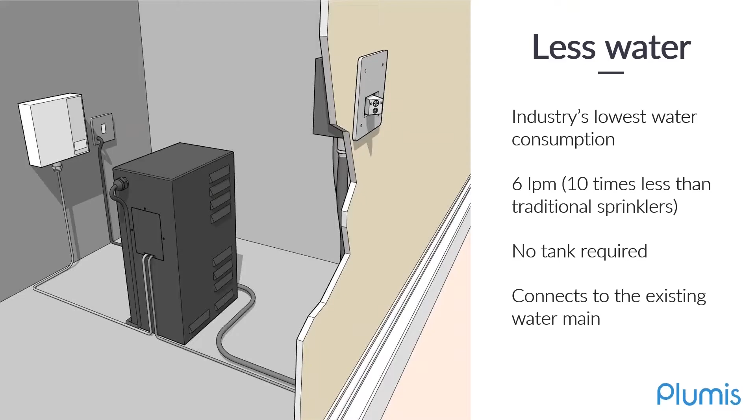And the important point here is that we can tackle dangerous fires with 1/10 of the water of a traditional sprinkler system. So the system draws approximately 5.6 liters of water per minute. That means you don't need a tank, you don't need a water upgrade. You can connect it to your existing water supply. So therefore it's very easy to retrofit.

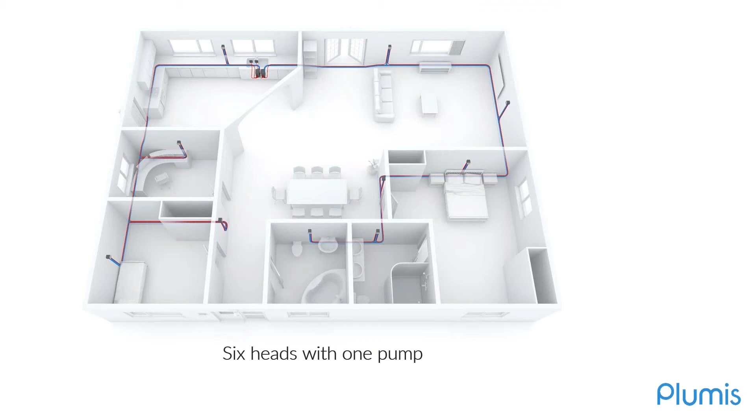You can see the kind of makeup of the product there on the left. You've got your spray head. It's connected to a pump, which is about the same size as a small PC tower. And in a small flat, it might look something like this. Here we've got 1 pump under the sink in this case. And up to 6 heads can be connected to 1 pump. These are spread around the property to ensure you've got a uniform coverage throughout the space.

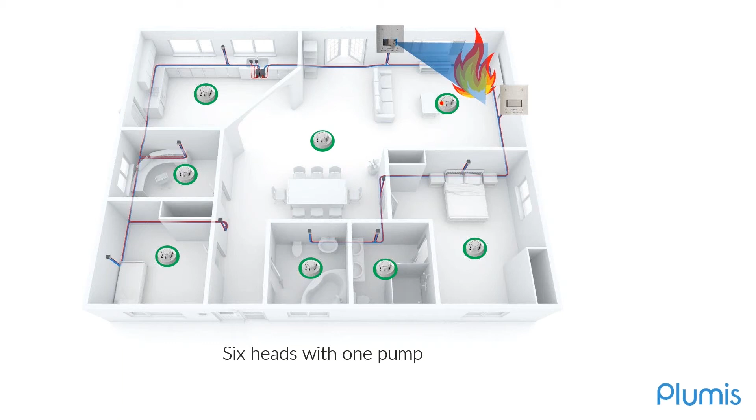Now, just to explain how it works, these heads are paired to the alarms, which are put throughout the property. In a fire situation, you would have the nearest alarm trigger. The heads connected to it would then begin scanning. The data from these heads would be compared, and one head would say, I've got the best visibility of the fire. The other head would close. That head would activate. And this is a really important point. Because we're only activating one head, we can limit the water requirement to 5.6 liters of water per minute.

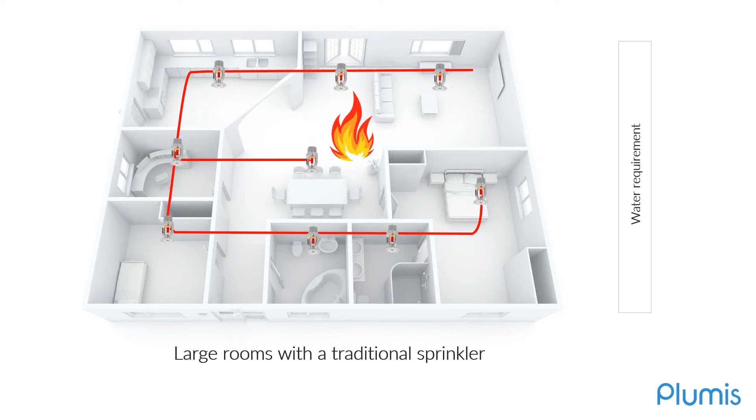This is a significant point because when you have a traditional sprinkler system and you're covering a large space, this room, because of something called AMAO, which is the assumed maximum area of operation, if the fire sat an equal distance between each one of those heads, you have to assume that all 3 of these heads will activate, and therefore you have to provide an adequate flow or water supply so all of those heads can produce the same flow and pressure as was seen when those systems were tested.

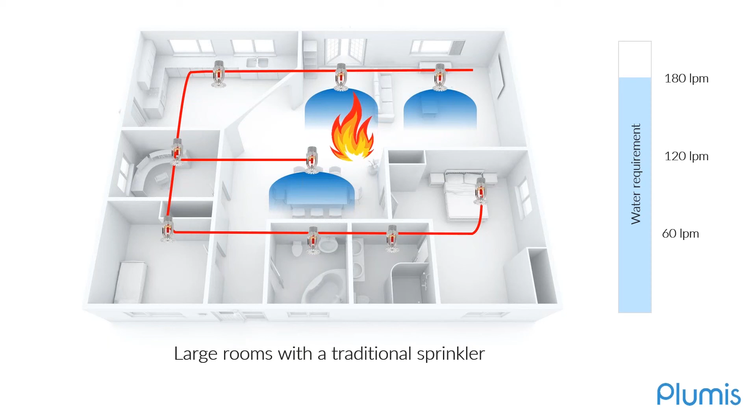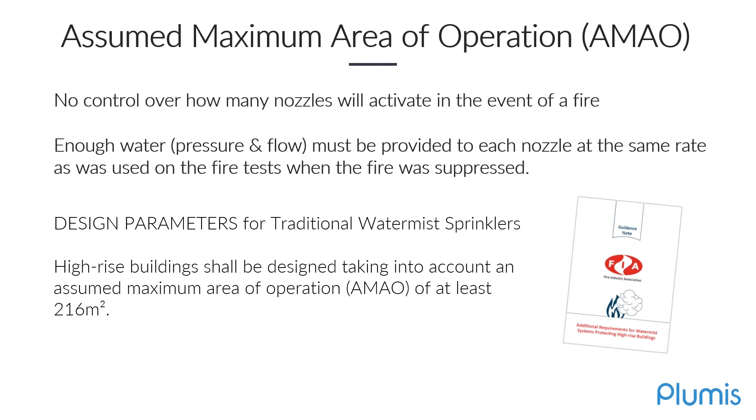So that means in a room or an apartment with a large open plan space, the water requirement isn't just the 60 liters of water per minute. It then increases depending on the number of nozzles, and so in this case 180. So this assumed maximum area of operation can mean that the water requirement is very significant in larger buildings. The FIA recently gave some guidance about retrofitting in high-rise buildings, and they said that it was important that designers assume the AMAO is at least 216 square meters. So you can imagine that's quite a significant requirement with traditional systems.

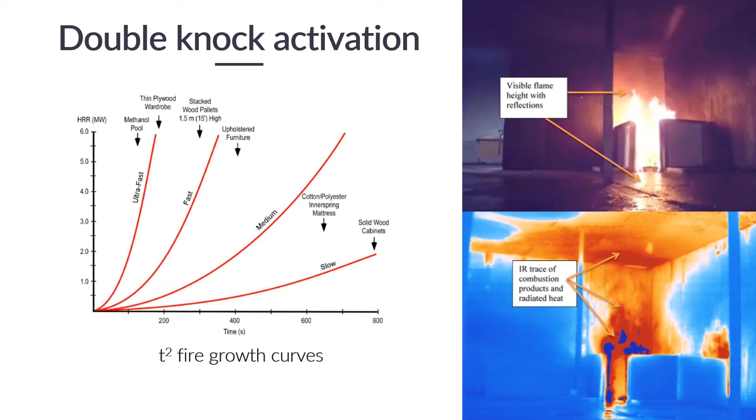The other thing that we do is utilize the same methodology that rate of rise heat sensors use in order to confirm a fire is there, and they use a fire engineering principle called T-squared fire growth curves, where we're looking at the rate of rise, which changes depending on the fuel packet, but we're looking for those conditions to say to our head to confirm, yes, there is a fire and I'm going to operate.

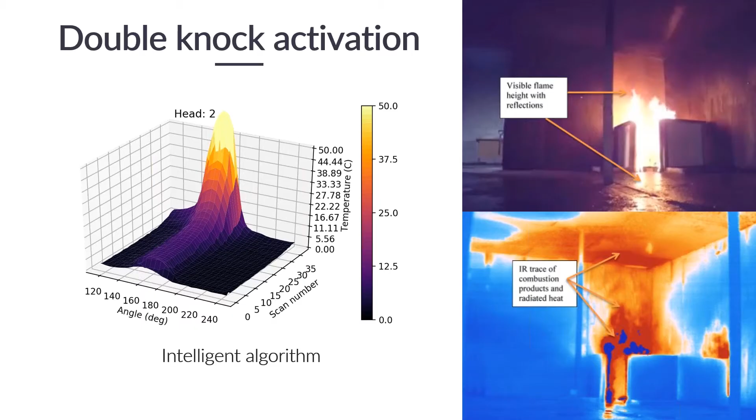So this graph here shows the scans from our head as it sweeps through 180 degrees over time, picking up that on this one particular point we've got the temperature rising. We can confirm that there's a fire in that location, and we're gonna activate. The reason we're confident that the system works is because we've done a lot of fire testing. So some of these videos were filmed here in the UK, some of the standard tests that we did.

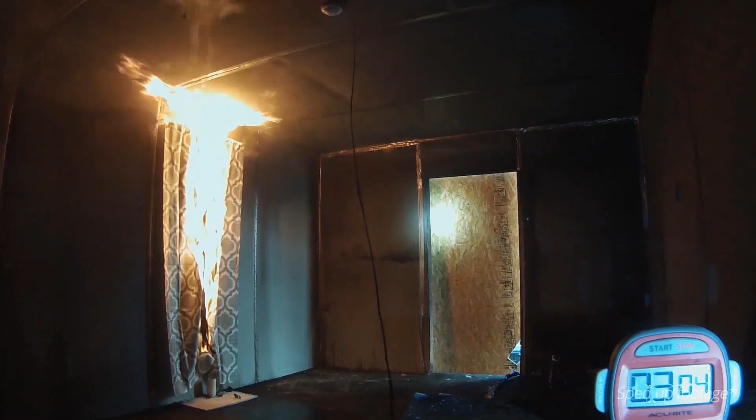Some were done with our partners out in America. One of the things that we wanted to do, so that we could be confident that the system would perform outside of sort of test conditions, was we set up loads of scenarios looking at the common causes of fire within the home, whether it was bed linen, curtains, concealed fires in a washing machine, just to be absolutely confident that the system is going to perform when it's called upon.

And what actually ends up happening is, because we're forcing a large amount of water mist in and around the fire, when the fire essentially breathes, it sucks in oxygen across the floor. The larger the fire gets, the more water mist it draws in towards it to suppress it. So you can see some of the different examples of this. There's numerous videos on our website and YouTube channel.

Okay, so the other benefit that we have of being an intelligent and an electronic system is we can build up a library of data. So every fire test that we do, every activation incident that we can get access to, we would download the data, so we get a heat profile in our database. And this is really useful because it means we can optimize when the system activates and ensure that it activates reliably.

So if Mr. Smith burns the toast, you have an initial spike of heat and smoke, but the temperatures don't follow those T-squared fire growth curves. The temperature comes down after the event, so our system can determine whether or not it believes it's a dangerous fire or not. And this is something that we are improving all the time.